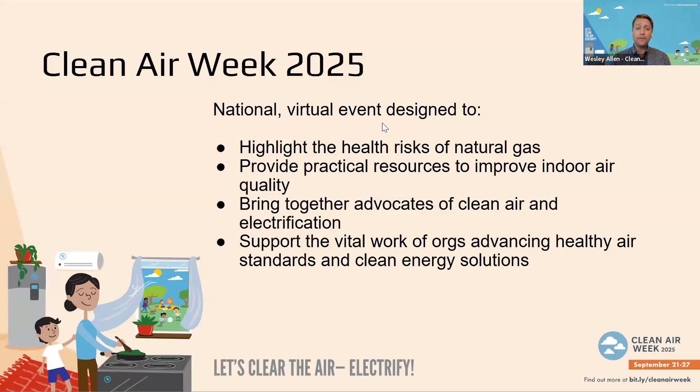Thanks, Joe. Yeah, the purpose of Clean Air Week is to really highlight the dangers of burning natural or fossil gas indoors. So this week we've had a host of webinars highlighting the health risks of fossil gas, providing practical resources to improve indoor air quality, which is really going to be a focus of today's webinar. Bringing together different advocates of clean air from around the nation who are working on these really important issues and supporting their work as we can.

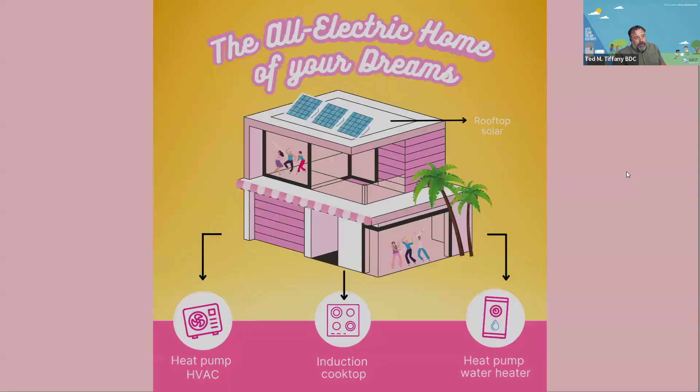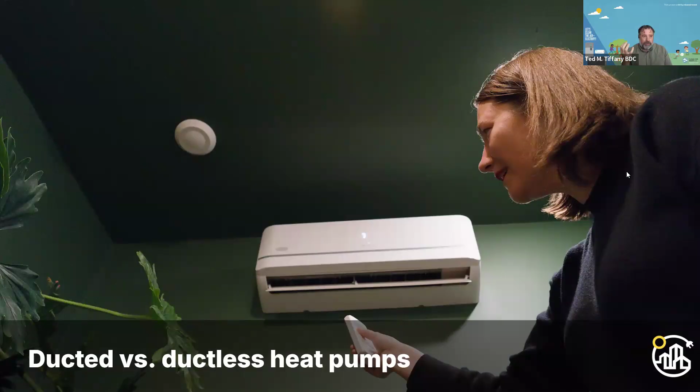And let's just start with heat pumps. Space conditioning comes in many different flavors. What we've got here on the screen is a ductless heat pump. It's kind of a wall-mounted application. These are zonally controlled. That's an option for you. It comes with visual impacts, right? So this is a wall-hung unit.

It's going to be like a new piece of art on your wall, but these come in very different sizes. I know one manufacturer that has the heat pump hidden behind a virtual art wall that you really don't see, but it's still considered a ductless unit. For my household, I really wanted to work with my 1917 classic Craftsman home to really not have a visual impact like this of a ductless wall-mounted heat pump. So I went to a ducted version.

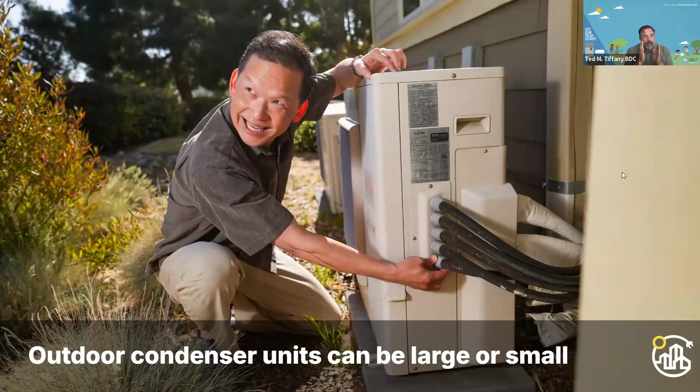The outdoor unit for that, very similar, right? Very slim application. The boxy air conditioning units of old are getting slimmer and smaller and getting quieter. So in HOA events where you have things like auditory impacts to neighbors, setback requirements, these are becoming much more versatile. And the condenser units can be very large or small.

When I talked about getting load sizing down, you get the loads down in your house with better insulation, better windows, air sealing. You can start to shrink the machines and your cost of installing a heat pump. But the location matters. So we'll talk about a couple of different options in space conditioning systems.

So in my household, I have this outdoor condenser in my driveway right next to where I park my cars. It's really no impact to my living situation or where my cars park. I found a really nice convenient space for it. And now my air handler's in my attic. I actually gained square footage in my house by removing the furnace closet. So the spatial issues will come into play.

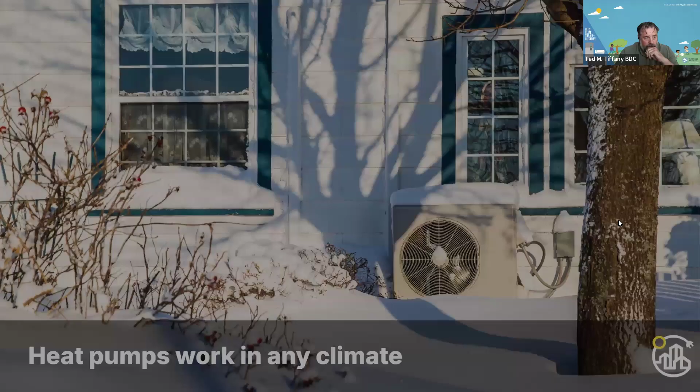So heat pumps are working in any climate now. The invention of cold climate heat pumps within the last 5 years has really changed the game for performance in cold climates. They maintain full capacity at -5 degrees. And many of these maintain temperatures down to -17.

Ground source heat pumps work in any climate. So if you're looking at really extreme environments, Canadians love our ground source heat pump. We're really looking at networked geothermal systems, thermal energy networks we call them, where we can connect waste heat from, say, a data center to feed a geothermal unit. But heat pumps can work in any climate at this point.

So let's talk about water heating. Water heating, changing out a gas water heater. I sat with manufacturers as the director of the Building Decarbonization Coalition in 2017, looking at space, form, power functions with the manufacturers. And the manufacturers responded brilliantly to this need. We needed a lower power connection. We needed to solve the electrical issues.

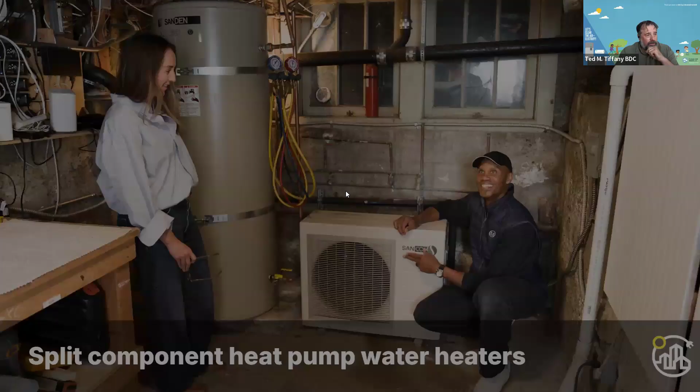Heat pump water heaters have come out with a lot of split versions now. There are a couple more coming to market, but the SanCO2 is a split unit. This remote condenser can be located anywhere. It can be located on the outside of the house. It can be located in a remote garage if you're in multifamily. And the tanks can be placed inside without any sound or ventilation issues. The best thing about this Sanden product, I'll say right now, it's using a refrigerant that has a global warming potential of just 1.

It's a CO2-based refrigerant that can produce a lot more hot water in a remote location and solve a lot of those technical issues. So I have one of these for my small granny unit, which had space issues and sound issues in the small spaces. So 450 square feet. The condenser is now outside of the living space, so that sound and cool that it produces is no longer affecting the interior environments. This particular one is located in a basement, but this can be remote located in a lot of different configurations.

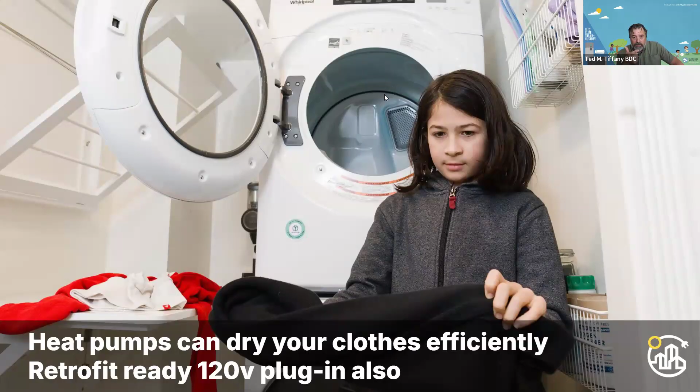Heat pumps are coming in all shapes and sizes now. We used to only have heat pumps in our refrigerator, a one-way heat pump we like to call it. Now heat pumps are doing the work in washing machines as well. So this is an example of a heat pump combo washer. You can also get heat pumps that just do drying, but this is a really convenient option for retrofits because it is a 120-volt option. It's ventless, and it washes and dries your clothes with one appliance. Now you're buying just one appliance.

So I have one of these in my small space requirements for my accessory dwelling unit where my kids live. And now they've got their own laundry machine. But I didn't have to duct it out. I didn't have to hardwire a 240-volt application like most of our electric dryers did. And a really easy install.

Induction cooking is kind of the key to the electric kitchens because we have so much discussion about gas cooking. This is usually the hardest appliance to make a justification for because people have been trained to cook on gas. Commercial cooking is cooking on gas. But what a lot of people don't know is some of the original chefluencers cooking on gas were provided gas kitchens so that they could promote gas. It wasn't necessarily for the benefit of cooking.

So what we like to say is induction cooktops are a better cooking experience. They don't heat the space up. They're safer kitchens. I don't have the risk of a grease fire in my kitchen anymore because there's no active flame. I tried to do a flambe the other night and I had to actually try to go find a lighter so I could light the liqueur on top of that flambe. And I had to scramble to find it. So much safer kitchens, much cooler kitchens. And I'll tell you what, best thing I love is I use glass cleaner to clean this. I no longer have to take those grills out and really clean underneath the stove.

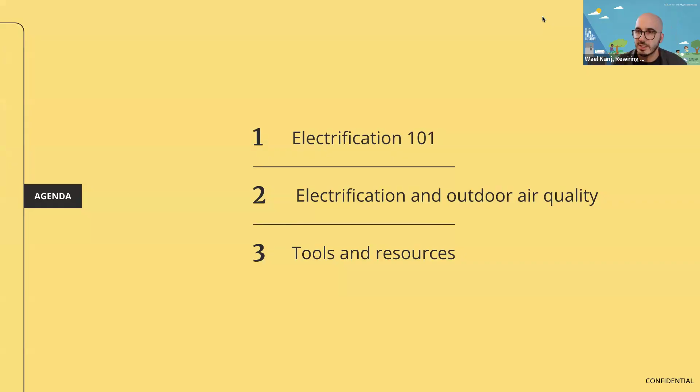So we are a national nonprofit focused on residential building electrification. So for the last few years, we've been working on transforming the U.S. energy system by shaping electrification policy, aggregating demand for heat pumps and other electric appliances at a local level, and partnering with industry to make electrification the norm for every household.

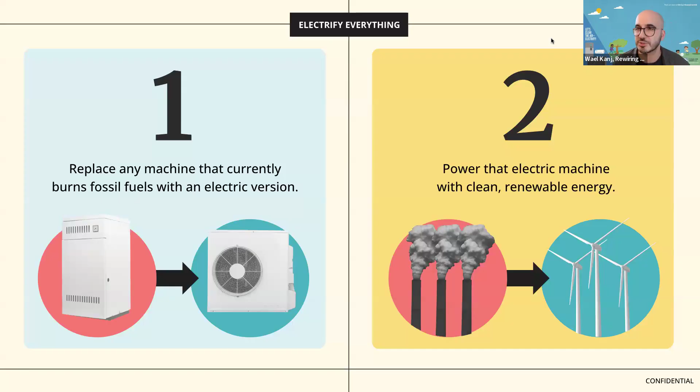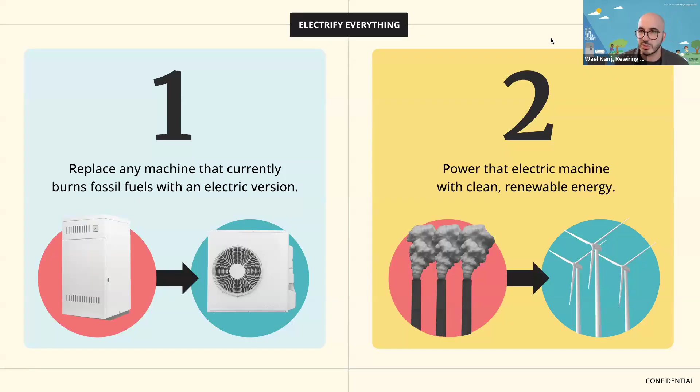When we talk about electrification, just a refresher from what Ted just described, we're talking about replacing machines in homes that currently burn things like gas, so like a gas furnace, replacing that with a heat pump, or a gas water heater with a heat pump water heater. And once that machine is running on electricity, it means that that electricity is produced with clean, renewable energy.

And we're doing all of this because of this number, which comes out of the research that our co-founder, Saul Griffith, did that led to our founding. It was this finding that 42% of energy-related emissions in the US come from these household decisions around what kind of car we're driving, how we heat and cool our home and water, how we dry our clothes, cook our food, and the energy we use to power all of that. So that number really defines personal leverage and guides our strategy, because there's a lot of power in the seemingly smaller everyday decisions that households are making every single day.

And not only does smart electrification decrease greenhouse gas emissions, but if we all do this right, we get a better, cleaner, safer, healthier and more beautiful world. And so I'll spend a lot of today digging in on that healthier part and understanding how electrification actually impacts outdoor air quality.

So I want to emphasize that the focus of our research and modeling was on the impacts of electrification on outdoor air quality. If you attended the webinar earlier this week, I think you got a great deep dive into how electrification and burning fossil fuels inside the home impacts health. A lot of that research was actually the impetus for us doing this research on outdoor air quality, because we really felt like there was a gap in the research on outdoor air quality.

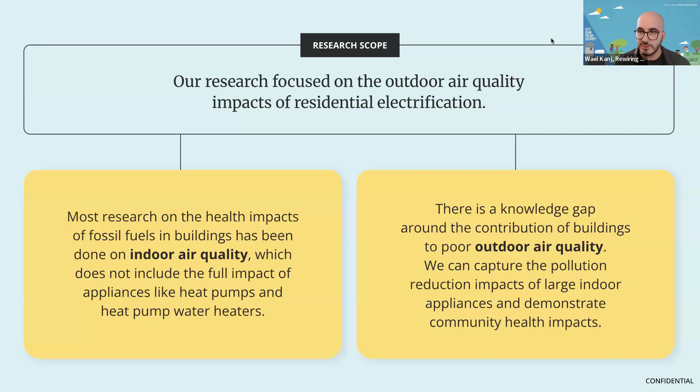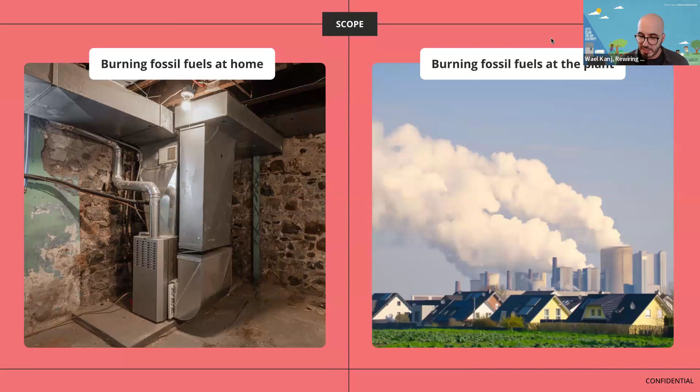And so we had to ensure that our modeling captured the two primary ways that home appliances can impact outdoor air quality. So it's burning fossil fuels at home, like from a furnace like you're seeing on the left, as well as burning fossil fuels at power plants to generate electricity. And so our modeling accounts for both of these. And the mechanism is that there's two things going on here, right?

So at the home, when you're burning fossil fuels for space heating or water heating or clothes drying, any of those appliances that burn things like gas or propane or delivered fuels, those appliances vent to the outdoors. And along with that ventilation are air pollutants like volatile organic compounds, sulfur dioxide, ammonia, and others that we call PM 2.5 precursors, or very, very minuscule air pollutants, which have a range of really negative health outcomes. They could lead to asthma attacks, increased risks of heart failure, lung cancer, and premature mortality or early death.

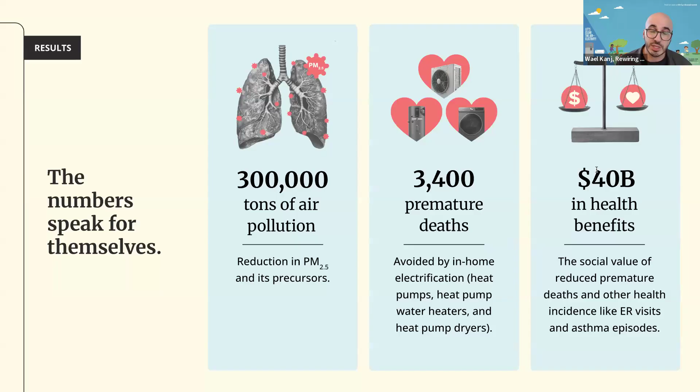And fully electrifying those three home appliances would result in about 3,400 fewer premature or early deaths each year, thanks to that reduced outdoor air pollution. And all that's valued at around $40 billion. And so these are really big impacts, and it doesn't even include the hundreds of dollars on average per year that households could see in bill savings from these electric upgrades, as well as any value associated with the greenhouse gas emissions, which is also substantial.

And so that's the national totals, but I think another reason our analysis was powerful is because we built it on top of really highly granular data. So it takes into account local health and mortality rates in assessing the impact of air pollutants in different places. It takes into account the difference in energy impacts from electrification through different household characteristics. So in certain areas that might have larger homes, those might have larger impacts than smaller homes electrified in terms of the total health impacts.

We're taking into account the present and projected future emissions of the electricity grid in terms of which fuels are powering it. And we're using local climate and geography as well as population density in the energy usage and air modeling work. So again, there's a lot of details here I won't fully delve into today, but happy to chat further about the details of our analysis here.

And so because we're using that database and building our modeling on top of it, again, we can sort of see what are the disparate impacts around the country, and how does that vary by different geography? So what you can see here is the average annual health impact of installing a heat pump in a single family household, normalized for the number of households electrified.

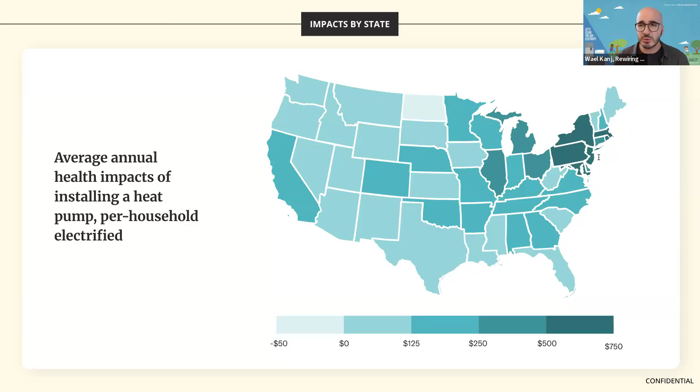So essentially what this is saying is that in some states like New York and Pennsylvania and New Jersey, every heat pump we swap into homes, replacing the existing appliances, could lead to between $500 and $750 per year in health benefits for the country. And so you can see how these numbers quickly add up to that 40 billion I was talking about on the earlier slide. And so we can see some interesting patterns emerge if we zoom in to different parts of the country.

So electrifying homes in the mid-Atlantic and Northeast, where heating needs are generally higher, where there are relatively cleaner grids that are projected to get cleaner over the next 15 years, and where there's high population density, means that all those factors contribute together to have higher positive impacts relative to other places.

And then in places like Florida, the impacts are relatively smaller, just because most homes there already use electricity, and the overall heating load is obviously a lot lower in Florida than in other states. So there's still a positive impact, because when you replace inefficient electric resistance heating or an inefficient AC with a heat pump, you're using a lot less electricity, so less electricity needs to be generated. Power plants will emit less pollutants, and there will be health benefits, but it is just relatively smaller.

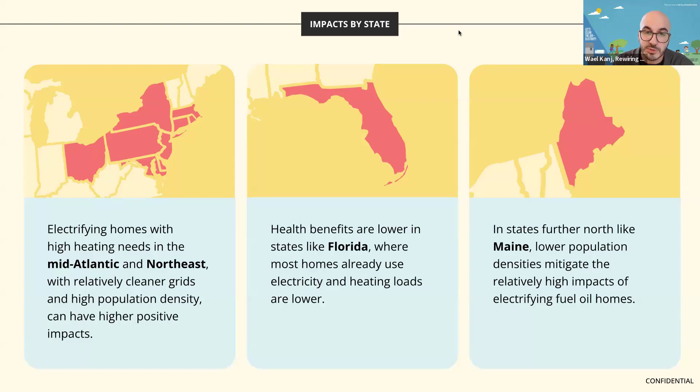And then in places like Maine, there's high heating load, but relatively lower population densities, or pollutants might not travel as much to higher population areas. And so there's correspondingly a slightly lower positive health impact from converting to electric appliances.

But another way that these health impacts can vary is by the type of original fuel used in the appliance before it's swapped out with a heat pump version. And so you can see here, splitting out these numbers by the type of fuel, retrofitting homes heated with things like delivered fuel oil or methane gas can lead to higher health savings, because these heating systems are more polluting.

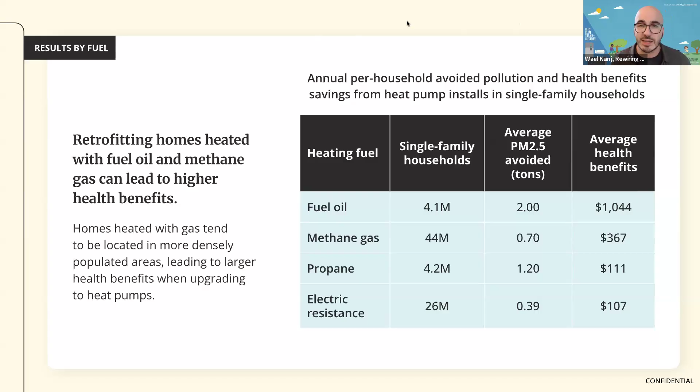And in the case of natural gas, a lot of these are in very highly populated areas. So places like New York and New Jersey, where each pollutant emitted outdoors has a high impact because there are so many people around to breathe in those pollutants.

So what does this mean for electrification? Some of the ways we envisioned this work being used are really just to strengthen the narrative around the benefits of electrification programs at all levels of government, as well as for states or local communities. So, for example, if there's a heat pump incentive program targeting low-income households in North Carolina, we could use this analysis and actually model that this would unlock around $110 million each year in national health benefits.

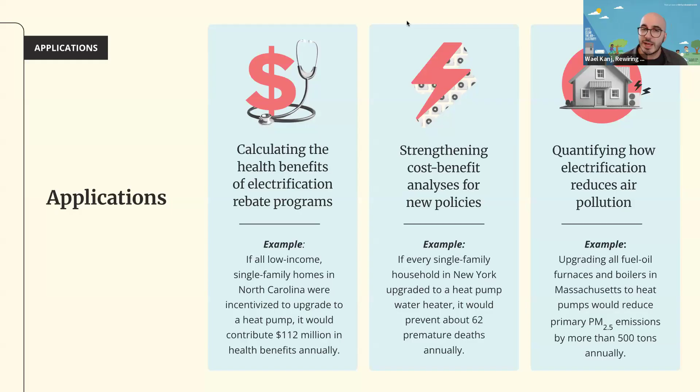And so one of our primary motivations was to encourage incorporating things like health benefits into cost benefit analyses. And with the granularity of data, we can definitely enable more of that, and not only the health impacts, but also the overall emissions impacts as well, in terms of quantifying outdoor air pollution.

So that's all I had for the health and outdoor air quality impacts work, but I did want to highlight the other electrification tools and resources that we created that are geared towards households who want to electrify their homes now. If you go to rewiringamerica.org or homes.rewiringamerica.org, you can access all the resources in one place.

So if you're wondering which incentives like rebates or tax credits you're eligible for based on where you live, you can plug in a couple pieces of information and use our savings calculator. We also launched a tool called the Personal Electrification Planner, which walks you through step by step, with just some details about your home, the journey that Ted laid out: things to do first, what to do next, based on your home's characteristics, and will provide estimates on how much money you might save with different upgrades or the overall environmental impacts. You can also find guides for finding contractors and answers to FAQs.